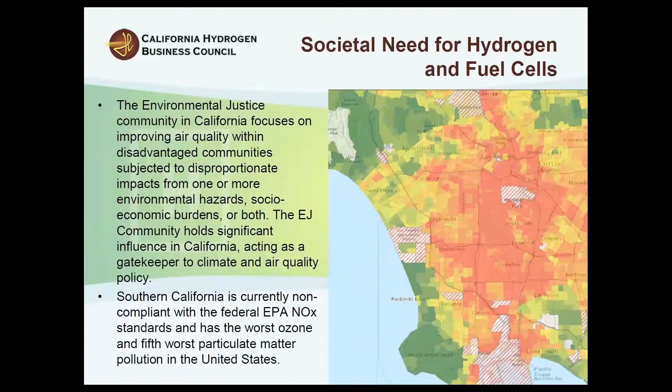It's interesting to note that Southern California is currently non-compliant with the federal EPA NOx standards, and has the worst ozone and 5th worst particulate matter pollution in the United States. Next slide.

So we wanted to get a one-for-one technology platform comparison between battery electric and fuel cell electric, and the specific application we chose to show this are fuel cell forklifts because they're the most commercially viable.

In fact, in the United States, it was just confirmed by Plug Power that there are over 27,000 fuel cell forklifts in operation, with an accumulated run time of over 200 million hours of operation.

Looking closer into the business of material handling, 77% of operational costs come from labor, and only 11% actually come from equipment. When you switch to hydrogen fuel cell forklifts in a facility that has at least 200 vehicles, the capital cost of putting in hydrogen infrastructure is actually lower than outfitting it with fast chargers.

Also, you don't have to use valuable warehouse space to house those chargers because the fueling infrastructure is quite small. And unlike a battery, a fuel cell forklift can maintain consistent power throughout a shift by maintaining constant voltage, so you don't see any sluggishness when trying to pull freight at the end of a shift.

Looking at specific savings between fuel cell forklifts and battery forklifts, there's 4 to 6% labor savings, 6 to 15% productivity increase, and 10 to 30% added enterprise value per year.

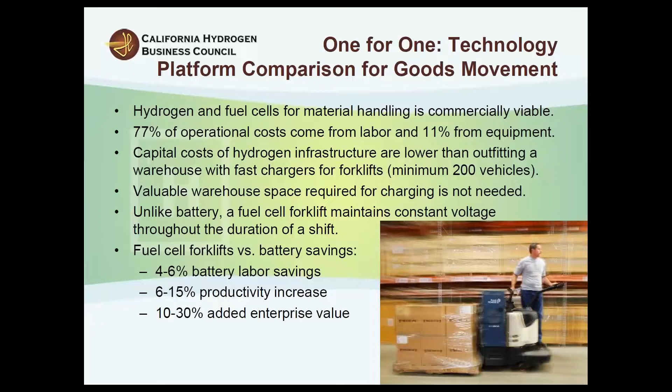So when comparing forklifts with an internal combustion engine, a battery, and a fuel cell, the fuel cell is the only technology that checks all the boxes of fast refueling, high performance, productivity, space utilization, and total cost of ownership, all with zero emissions. Next slide.

It's very important at this workshop that we heard from OEMs, especially in the coming years, because the California Air Resources Board is going to begin to require a percentage of sales of Class 2 through 8 trucks to be zero emission. I believe this will begin in 2024. So we wanted to hear from the OEMs and what they're doing to prepare for this.

Specifically, Toyota has been committed to advancing zero-emission vehicles, specifically fuel cell electric trucks. With its Project Portal, launched in 2017, it has since moved over 10,000 miles of freight, and the most recent version of this vehicle can reach over 200 miles in port drayage operations. Given the promise of cheaper renewable hydrogen in the future, the cost of operating a fuel cell electric truck is projected to be lower than a conventional diesel truck, as repair and maintenance costs are low for a fuel cell electric truck.

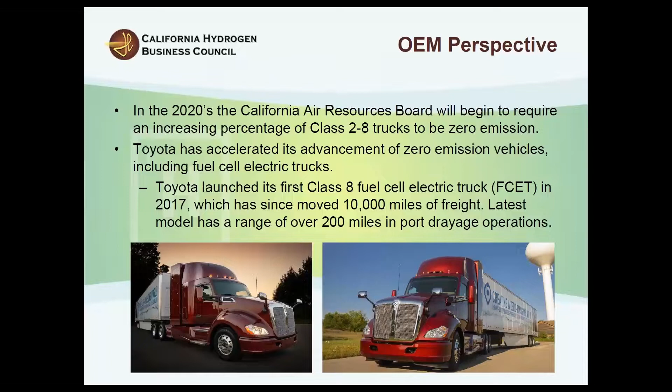Hyundai is also looking to do a similar large-scale fuel cell electric truck project in California. Japan and Korea are implementing aggressive plans to become hydrogen societies. Hyundai is advancing its fuel cell technology across all transportation sectors, including medium and heavy duty, with plans to produce 700,000 fuel cell systems by 2030, including Class 2 through 8 trucks and buses.

A very interesting project happening in Switzerland is the deployment of 1,600 35-ton trucks named Xcient by 2025, each with a range of 250 miles and a refueling time of no more than 15 minutes.

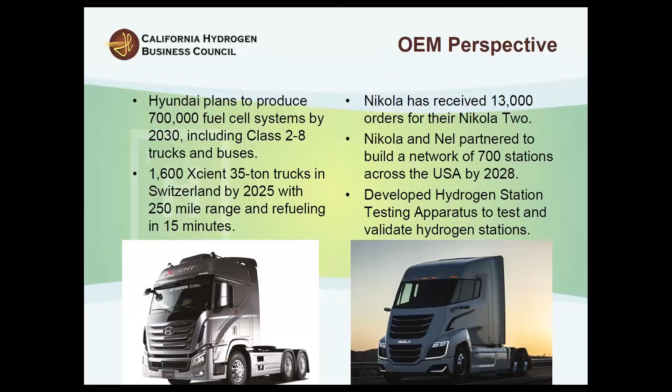At the workshop, we also heard from Nikola, who has received 13,000 orders for their fuel cell electric truck named Nikola 2. Nikola and Nel have partnered to build a network of 700 hydrogen stations across the United States by 2028, and they have developed a hydrogen station testing apparatus to test and validate their hydrogen stations. Interestingly, the first Nikola-Nel station will actually be built in Southern California, producing 8 tons of hydrogen per day.

One of the most important pieces of this workshop was to actually hear from the end user, and that was something we wanted to make sure we had. So there's no one better than Total Transportation Services Incorporated to talk about their experience with fuel cell electric trucks. Over the years, they've been testing a variety of fuel cell electric trucks in their trucking operations in the field, so we have direct operator experience to hear from.

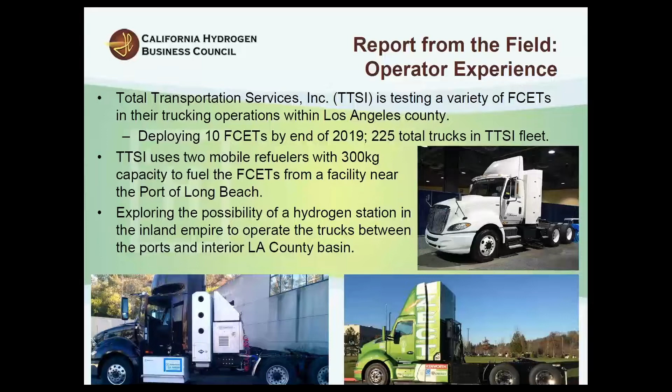Right now they have a few trucks, which you'll hear more about from Tony, and they will have up to 10 by the end of the year, with a total fleet of about 225 trucks. They are refueling these trucks with 2 mobile refuelers located near the Port of Long Beach, each with a capacity of about 300 kilograms, and they're very interested in getting a hydrogen station in the Inland Empire, which will allow them to operate the fuel cell trucks between the ports and the Inland Empire, the interior LA County basin, where a large percentage of their freight goes.

You can't have vehicles without infrastructure, so talking about infrastructure was another important piece of this workshop. We heard from Hydrogenics and Air Liquide on their large-scale renewable hydrogen production facility, using 5 megawatts of electrolysis to produce 4,000 kilograms of hydrogen per day. That's enough for 100 fuel cell electric trucks. This design is scalable up to 40 megawatts of electrolysis to produce 17,000 kilograms a day.

It's interesting that the Air Liquide model is hub and spoke, so they have hydrogen production and distribution starting from liquefaction. The liquid hydrogen tankers are then moved to a distribution hub where the liquid hydrogen is vaporized into gaseous hydrogen and distributed to the station. The liquid hydrogen tanker can actually move up to 3,500 kilograms of hydrogen.

One of the most recent developments was an MOU between Nel, Air Liquide, Hyundai, Nikola Motor, and Shell on hydrogen fueling components, specifically to develop standards for high flow nozzles for heavy duty trucks. The target is to fill a heavy duty fuel cell electric truck in 12 minutes or less. Shell will actually use Nel electrolyzers to produce hydrogen on site to test fuel cell electric trucks in the Los Angeles area for Nikola, and the lessons learned from the successful deployment of fuel cell electric buses and their infrastructure can be applied to heavy duty fuel cell electric trucks to assist in deployment.

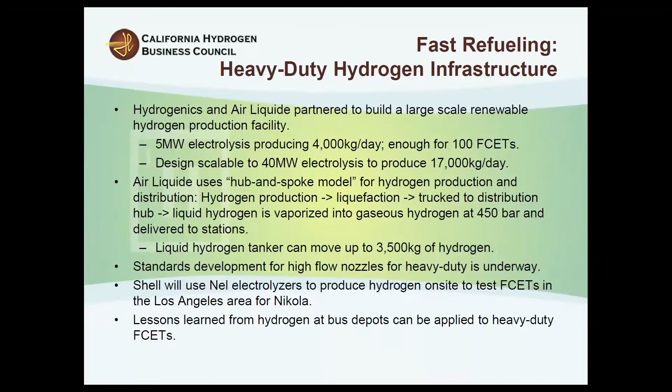So to wrap this up and give you some conclusions and takeaways from the report, we really wanted to harp on the importance of the environmental justice groups and their continued engagement with the hydrogen fuel cell industry, and also communication with the end users and the fleet operators. These communities are the ones that are going to benefit the most from this technology. They're located right along the freight corridors, and they're the ones that can be the biggest advocates for the technology. So we need to educate them, assist them, and empower them to help make this transition to zero emissions.

And hydrogen fuel cell technology is proven. It's proven through various demonstration projects, and now it's time to scale up to enable mass deployment. And to do that, there needs to be funding in place through policy designed specifically for heavy-duty and medium-duty vehicle rollout. That includes funding for infrastructure, which is an extremely important piece.

There also needs to be an end-user incentive, something that they can see on their bottom line to help them transition away from carbon-intensive fuels such as diesel and move over to zero-emission technologies such as hydrogen fuel cell. Also, there needs to be a comprehensive multi-stakeholder state action plan for the development and deployment of medium and heavy-duty vehicles and infrastructure in the state of California.

It was noted that the only perspective we were missing from this workshop was from the energy utility companies, because they play a major role, especially when you're talking about getting into large-scale on-site hydrogen production through electrolysis.

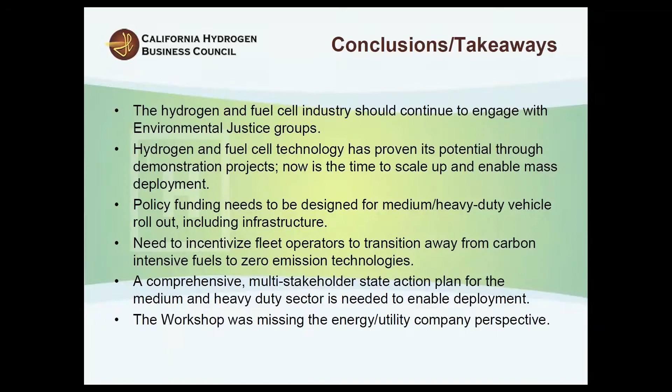Good afternoon, everyone, and thank you for the opportunity to be a part of this conversation. And I'd like to thank CHBC specifically for inviting us to be a part of the conversation, and I'm looking forward to providing our point of view on the role hydrogen can play in the future of freight transportation.

For those unfamiliar, a brief overview of the Port of Los Angeles. We're the nation's largest container port. Founded in 1907 as a department of the city of Los Angeles, we operate as a landlord business model, where we rent out the land to private entities that actually operate the facilities and handle the actual shipping through our terminals. We cover 7,500 acres of land and water, 43 miles of waterfront, with 27 cargo terminals. So if we're the landlord involved, we don't actually own any of this equipment or provide any of that service.

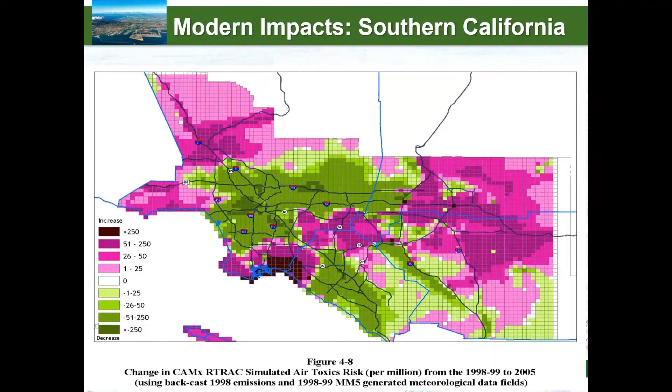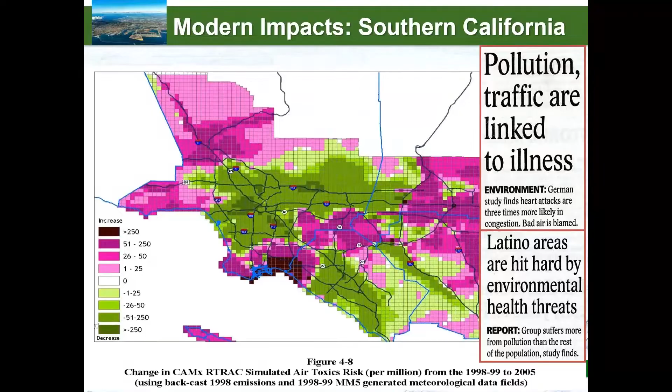Because we are the city entity in charge of this area, we are perceived as the responsible agency, and thus we are required to find a mechanism to move towards cleaner operations. To that end, this resulted in our Clean Air Action Plan, a joint document between us and the Port of Long Beach that outlines our strategies and goals for reducing air emissions from port operations.

This is a broad document covering all source categories from the port, including the major ships, the trains coming in and out, and the harbor craft. But for the purposes of today's discussion with regards to the role of hydrogen, I wanted to focus on two of our primary goals in the plan: specifically, that all terminal equipment that handles the container goods and other goods coming in and out of the port be operating on zero emissions by the year 2030, and for all on-road drayage trucks that service the port to be zero emissions by 2035.

In order to meet those goals under the Clean Air Action Plan, we have tasked ourselves with undergoing feasibility studies into the technologies in question on a three-year basis to determine their potential for widespread implementation. Can this given piece of technology be adopted by a fleet at wide scale in the near term? The first of those documents, for the on-road trucks, was released in April of this year, and the subsequent document on terminal equipment will be coming out in the coming weeks.

The conclusions with regards to zero emissions is that the current technologies assessed are not ready or feasible for widespread implementation today and are unlikely to be so within the next 3 years. And many of the reasons why the current models are not capable of doing the jobs we believe them necessary to do could potentially be addressed by hydrogen technology.

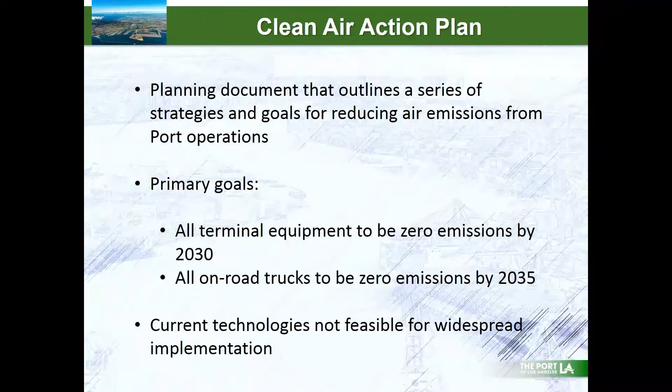So what does hydrogen bring to the table that most of the current technologies can't quite handle? The first and foremost is the capability to continue operating at longer ranges, either literal distance or longer times of operation. Given current projections of hydrogen trucks, you can get upwards of 350 to 400 miles of operation on the current or next planned models off a single fueling, and your fueling time is much more comparable to standard diesel options than the electric plugs and charge.

Our port services, while there is a decent amount of traffic done near port going back and forth between close warehouses or near-dock rail yards, a significant portion of our trucking fleet travels all the way out towards the Inland Empire areas, upwards of 60 or 70-mile routes, and even some goes further up into the central California Valley, out near Merced, up to 350-mile routes. Current battery electric technologies simply can't get close to those distances, particularly while pulling a fully loaded container.

As referenced, hydrogen offers a comparable driver experience to diesel when operating their truck. You have the same concerns as you do driving a diesel truck, and there's nothing extra. You've got a fuel gauge that runs down, your fueling time is roughly what you're used to, and your range is as you expect it to be. Whereas for battery electric vehicles, you have to worry about the amount of time it'll take to charge back up, and the fact that the heavier your load, the faster you'll be pulling down that battery charge. So you have to keep track of that as well, which is something the drivers currently aren't aware of.

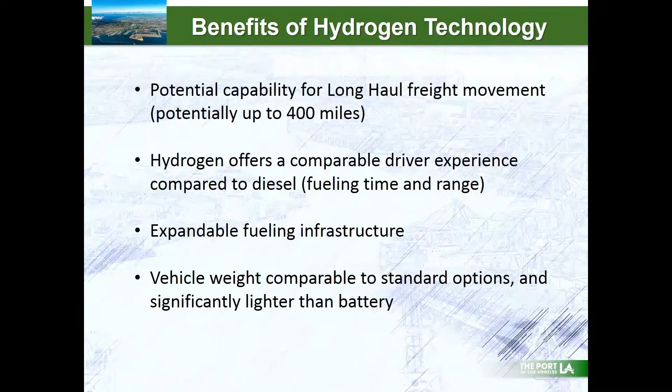And the final point, as was alluded to a little bit earlier, the actual vehicle weight of the projected current hydrogen models is comparable to your standard diesel options, both of which are significantly lighter than battery. When it comes to freight transportation, every pound that's in your vehicle is one pound less you can pull in your container, and that is a significant competitive challenge when it comes to the battery electric vehicles.

That said, there are still some challenges for hydrogen technology to overcome in the near future, and we'd be remiss not to go over a couple of these. The first and foremost is that the actual equipment itself and the fuel is extremely expensive in comparison to all the other options today. Both the truck itself and the fuel required to move it are several times the cost of diesel, and also significantly more expensive in comparison to the battery electric models.

When we say the second bullet here that says unproven technology in heavy duty sector, it's referring specifically to port environments and these exact pieces of equipment. While the fuel cells themselves have been proven out in all kinds of various harsh environments, there is still a need to see them in operation under the duty cycles expected, both near port in marine environments, and handling the steady routes and traffic that port service requires.

The challenge behind infrastructure permitting is not unique to hydrogen per se, but the fact that many jurisdictions installing new infrastructure are new to the hydrogen permitting game can be a challenge in and of itself, and finding ways to streamline that is key.

And finally, renewable generation is a very key point in moving this forward, particularly with the environmental justice communities. There are many views that hydrogen is formed via simply using steam methane reformation from natural gas and is not a mechanism towards zero emissions. So being able to demonstrate renewable generation at scale will be key moving forward.

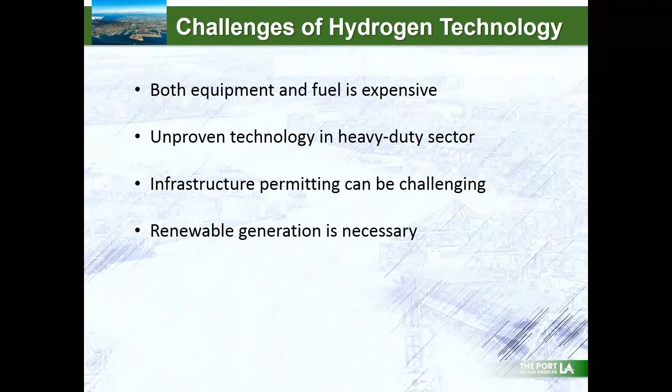So all of this builds into the discussion that led to our current grant project that we were awarded last year through the California Air Resources Board, through their ZANZEFF grant program.

Forgive me for the acronym, it was not mine. The Zero and Near Zero Emission Freight Facilities grant solicitation was released last year, offering up to $150 million for major zero-emission or near-zero-emission projects in California demonstrating freight movement.

Actually, $205 million were awarded, and our project was awarded $41 million to demonstrate a connected shore-to-store system of moving containers from our terminals all the way to their end destination entirely on zero emissions.

The key hydrogen element here is that we will be developing 10 hydrogen fuel cell Class 8 drayage trucks, building off those Toyota trucks that Corey mentioned in his presentation. Toyota is partnering with Kenworth to develop these alongside our timelines, and they will be deployed alongside two heavy-duty hydrogen filling stations, one near the port in Wilmington, California, and one in the Inland Empire near Ontario's airport.

The idea is to provide that connected infrastructure and begin building out the network necessary to truly transform the sector. The total project is roughly $84 million, with $42 million coming from the partnership between the ports and our demonstration teams.

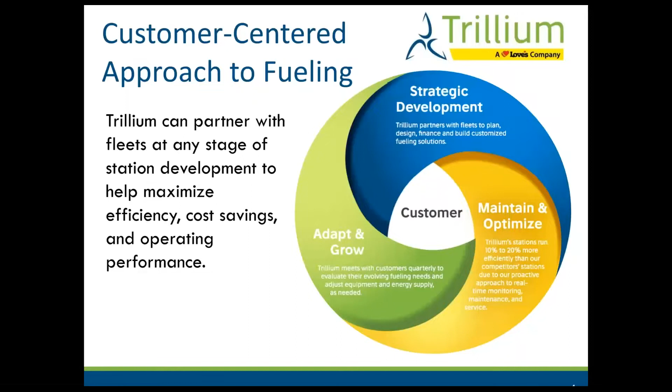We take a customer-centric approach to this. We think it gives customers the best overall view of the market and direction on where they're headed, and helps us provide for those needs. In developing a new market like this one, we need to start with a strategic outlook on what the customer wants to achieve and how. We try to understand where they are on their goals, what cost savings and efficiencies they expect, and then optimize their operating performance.

To that end, we've got a service network that spans from coast to coast and operates our 220 stations at a very high level of reliability, which customers will always need in the commercial space.

A little bit about our experience in hydrogen and one of the projects we built in the heavy duty sector. This is for a transit authority, OCTA, in Orange County, California. It is currently the largest heavy duty commercial hydrogen refueling facility in the United States.

It was built and should be up and running here in the third quarter of 2019, so we're just getting that going now. It was actually designed for 50 heavy duty buses, and the system will actually start with 20, and they've got the opportunity to grow it up to 50.

The system was designed to provide 30 kilograms a day of hydrogen fuel per vehicle with 6-minute fuel times with 2 dispensers running simultaneously. This operation is very familiar to the transit.

They come in, they refuel, they go back and they park their trucks and move on. Very different from what some transits are looking at relative to battery electric bus deployments, where that will have a big impact on their operations and change the way they need to do things.

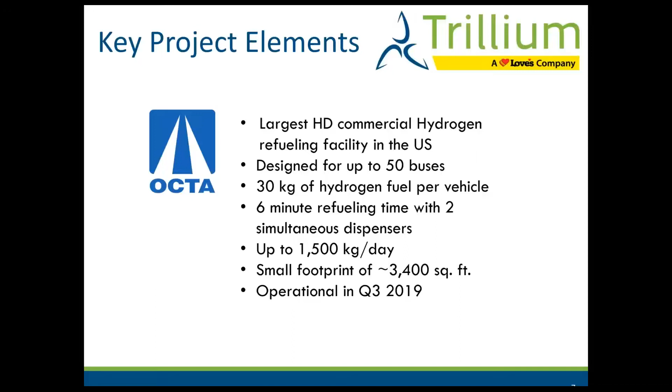The system itself will hold and dispense up to 1,500 kilograms a day. It's got about a 3-day storage capacity. The footprint is fairly small. As you'll see on the next slide, it's on this rendering, it's a liquid delivery system.

The customer wanted to go this route as opposed to an on-site SMR. There were a lot of considerations that went into that prior to the arrival on the scene, but this is the system we built for them, and we'll have it started up here in the third quarter of this year.

We expect it to run very well and operate very reliably over the course of the next, what will be a 5-year contract we have with them, but this system should run for at least 10 to 12 years.

The cost of this system was around $5 million to service this load. And we expect that with about another $2.5 million investment, or about another 50% investment, we could double the size of that facility pretty easily and have it operate up to 100 vehicles.

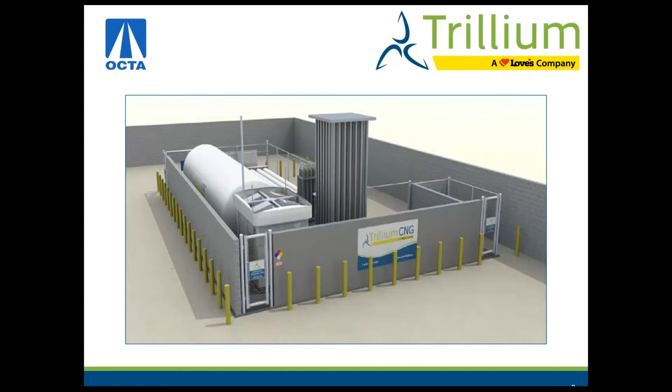In terms of some of the benefits and barriers that are facing us in the development of this market, many of these have been touched on by Corey and by Jacob already. I'll try not to be repetitive.

Some of the things that we're trying to look at here, we implement these systems across the United States commercially for a lot of people. So we'll take a very commercial perspective to this, and I think Tony will have some things to add as well from a commercial perspective.

The benefits, of course, are the zero tailpipe emissions associated with the fuel. That's a goal we have. Low carbon would also be nice to have with that. Using renewable fuels to generate that, or electrolysis, will certainly add value to the fuel long term.

Cost effectiveness only comes with scale in hydrogen. I think what we're seeing in the battery electric market, if I can draw a comparison there, is that battery's easy to just start small. You can try a couple of these things out and see how it goes. Hydrogen really doesn't work that way. If you're going to make hydrogen work and work cost effectively, you're going to need to do it at scale.

That's the only way you're going to get your fuel costs down. And eventually, when the market starts to mature, when we see heavy duty truck sales increase, we'll see prices come down with more competition for more product that's available into the marketplace. So we look forward to that.

The technology is, as both Jacob and Corey mentioned, is improving. There are some folks putting together some OEM product now. Duty cycle, range, refueling speed, all of those are benefits that hydrogen enjoys that are similar to diesel or natural gas commercial operations today, and certainly what our customers will be looking for in terms of making this product work in the forward years.

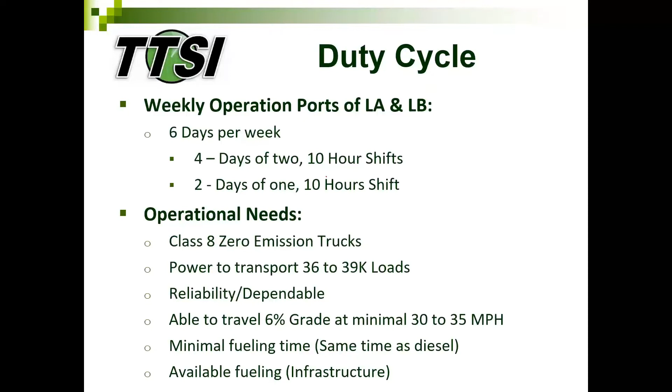This slide represents our duty cycle in the ports of Los Angeles and Long Beach. We operate 6 days per week, Monday through Thursday, anywhere from 20 to 22 hours, running dual shifts. On Fridays and Saturdays, we have one shift operating 10 hours. Our operational need is Class 8 zero-emission trucks; we do not operate Class 7 trucks. We need the power of these trucks to transport loads anywhere from 36 to 39,000 pounds. Trucks must be reliable, dependable, able to travel a grade of 6% at a minimum speed of 30 to 35 miles an hour, with minimum fueling time - same as diesel, around 15 to 20 minutes - and available fueling infrastructure in the areas we serve.

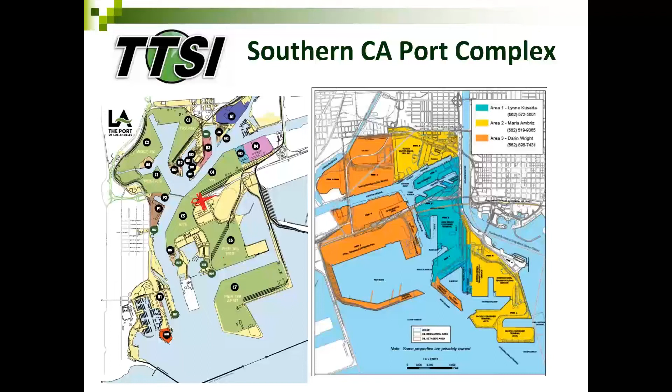This slide shows the map complex of Port of Los Angeles on the left and Port of Long Beach on the right. The Port of LA has 7 terminals we serve, and the Port of Long Beach has 5, a total of 12 terminals. If you look at the slide on your left, there's a red X - that's where our trucks are domiciled. So based on this map and our location, we can be at any port, at any terminal in the port complex within 5 to 20 minutes, depending on traffic flow.

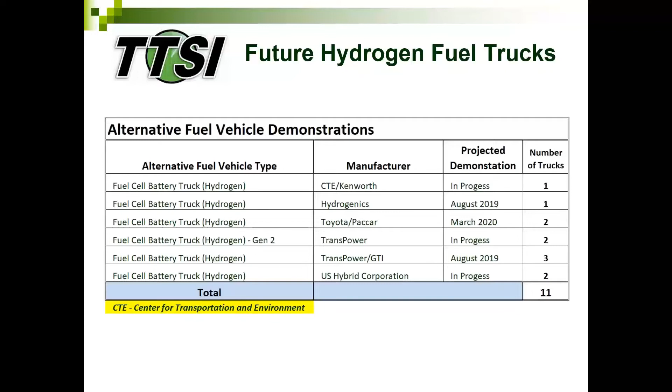And then the takeaway from our experiences: when we look at the fuel cell technology, we believe, at TTSI, we're moving in the right direction with heavy duty technology.

We see a positive trend in this technology. We got new players in the heavy duty game, the OEMs and the integrators, stepping up and listening to the end users about what is actually needed for the duty cycle.

Downtime is reduced and issues are resolved quickly. In the past, it's been more of a, well, we have to bring the truck back and check it out. But now when the truck goes down, we give a call to the supporting technology, and they tell us what they're going to do, and through a computer, they're able to get the truck up and running.